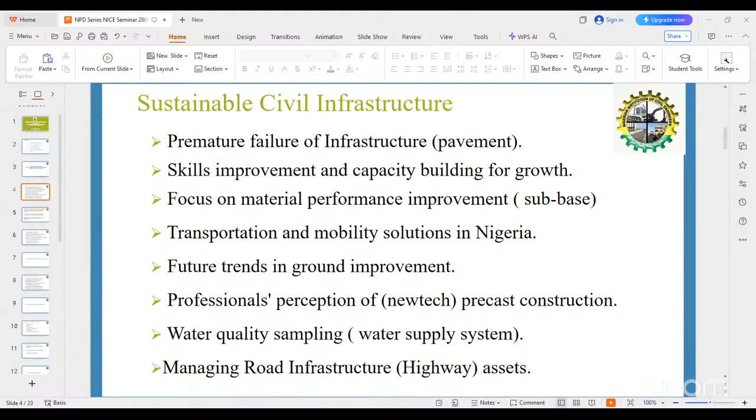Today we'll be talking about civil infrastructure. There's a big emphasis on building collapse, which is a misnomer, because we've been having building collapses for more than 10 years. But in recent years it's become almost unexplainable. I see that civil engineers have not owned it, and practicing structural engineers have not owned their turf. We must find solutions to how we practice so that we can bring sanity, so that building collapse would be eliminated and eradicated totally.

So we'll talk about buildings in urban settings. I want to focus a bit on urban cities and developed areas.

Water supply and wastewater disposal systems. Many of us are civil engineers practicing in this area, but I ask how well have we owned what has happened to the system? In the last two or three decades, anyone born in Nigeria who lives in highbrow estates, maybe in cities like Abuja, many graduates in the last 10 years probably didn't know that Nigeria had water systems that worked, where you open your tap and it would flow without needing a borehole in your backyard.

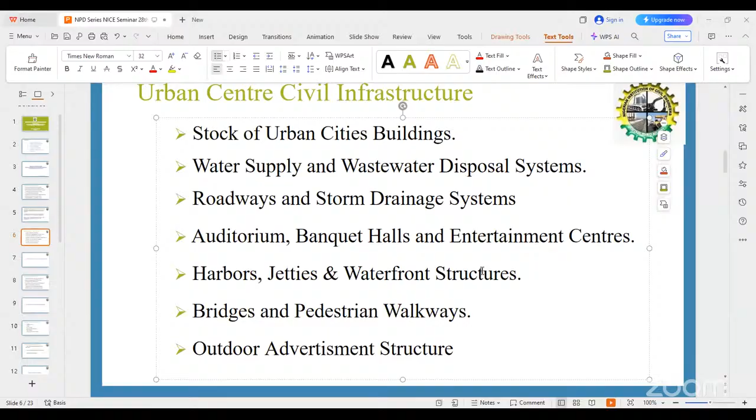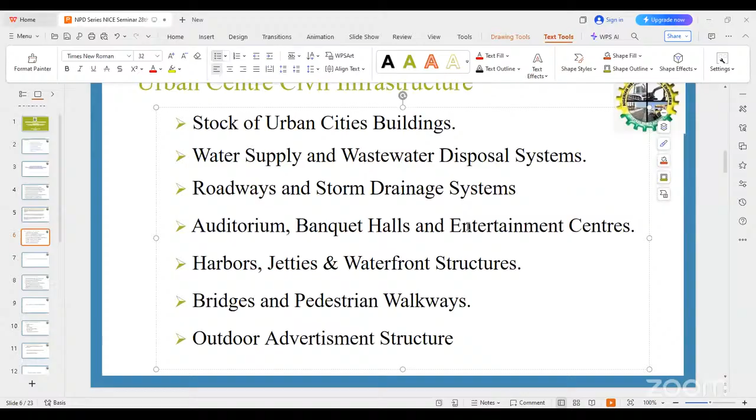So we'll look at this, and I'll speak in a very broad way, but when we have questions, I hope I'll be able to delve deeper.

Sustaining the nation's infrastructure, what do we as civil engineers perceive our work to be in sustaining the nation's infrastructure?

I put this together: we plan the required supply of civil infrastructure in a city, a nation, a region. We find that roadways need to be done to connect communities. We also find that communities need to be developed: housing, interaction, entertainment, socials, parks. So we design the civil infrastructure.

As we go with the roads, we also go over wetlands, we do bridges, and we go over land bridges with flyovers. You have quite a number of them in Abuja, one of the leading cities by population, and in Port Harcourt and the likes.

We do the development of civil infrastructure, meaning construction. Who is handling the construction? Who are the contractors, who are the designers? Are we transferring knowledge? In the last 40 years, who has been in the forefront to challenge and ensure that younger engineers are getting the required knowledge to strengthen the industry?

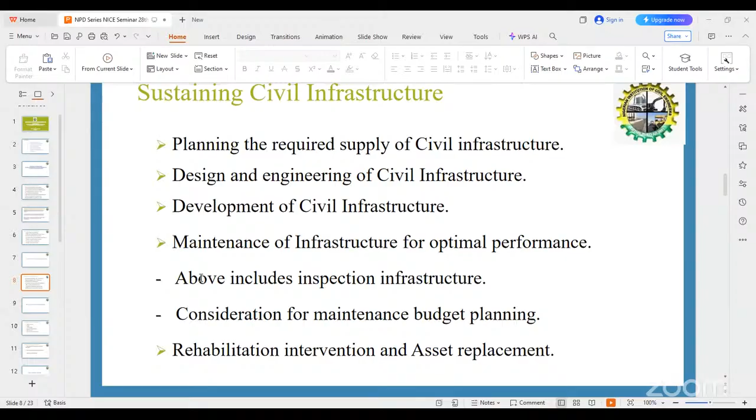Aging and failing infrastructure - let me give a few examples. Yes, Abuja was built a few decades ago, but we have infrastructure that is continuing, and we also have new infrastructure that have been planned.

But let's come back to cities that were founded many years before then, like Ibadan. We have roadways which have been the same size, and the infrastructure has been there for 60, 70, 80, even 100 years. And what has happened to it? What is the story of this infrastructure? That's what we call the aging.

Yes, every nation in the world is visiting their infrastructure for aging. They actually have what is called the scorecard in the US, championed by the American Society of Civil Engineers. I find it very interesting that we had a paper, a booklet done at a time, but I think somewhere in the line, somewhere in logistics, the infrastructure scorecard for our infrastructure in Nigeria was just missing in transit, or there was a bottleneck and it stood somewhere.

But I dare say this, that as NICE, the Nigerian Institution of Civil Engineers, we have the clout, we have the voice. We can stand to say this is what we're presenting as a white paper. We can give government the support it needs to know what and how they're performing, as these are capital projects headed by and owned by the governments in different categories, from local government to state government, who own most of the whole highway and road infrastructure.

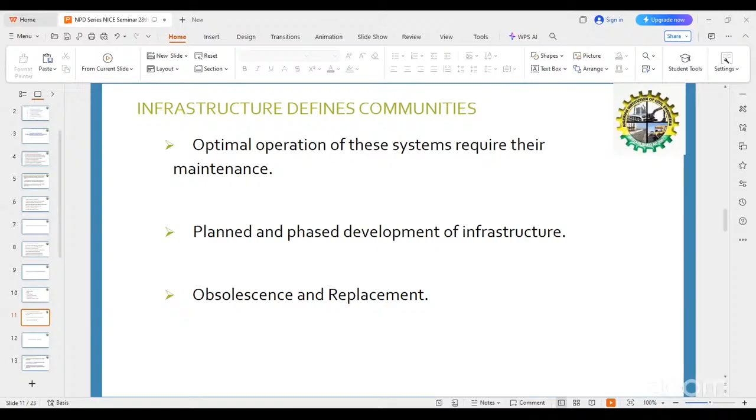Repair is always necessary. Even for a grinding machine, for pepper, you need to replace and repair. For a vehicle, you need to change brake pads. This is what we do on a regular basis because of our evaluation of a system. The same thing occurs with every civil infrastructure.

We need to check. They tell us the story and they use the word - the artisans we use say, we want to maintain it for you, we want to do maintenance for you. But the maintenance would only be possible when we have carried out an inspection. Who is most fit to carry out an inspection other than the proponents or the ones who designed it?

We restore these structures to be in a good state, a good state of performance, and also performing optimally. Sewage system - an open sewage, I mean, it just beats me.

Almost every community, everyone who has a personal building has a sewage tank underground in their compound. And when it gets full, somehow they find their way onto the common drain. Now government is making the law. I saw on social media a few days ago, it's now law under section A, B, C, D. And I said, what have we done?

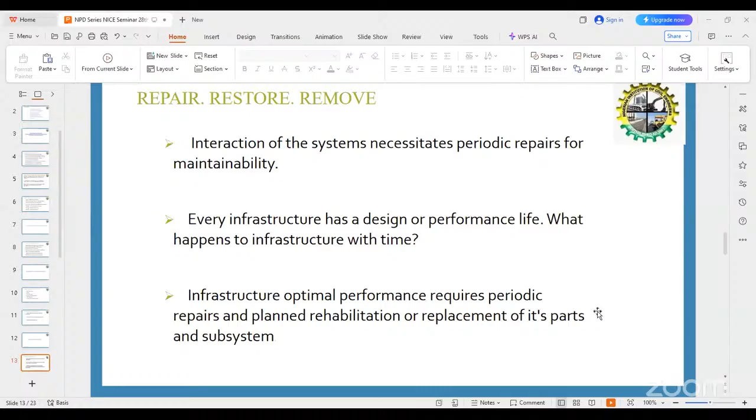Strategies for periodic infrastructure. We're looking at time, we've spent an hour since we began, but I'll rush through this and let's keep our questions. We'll take that at the end, strategies for infrastructure inspection.

So I put this together for us from the many years of experience I had in infrastructure, highway infrastructure and transportation infrastructure development, and area of practice.

Every infrastructure requires the gathering of requisite data, not just any data, the data which informs the reliability and performance state of this infrastructure. I must be able to know what is happening on every infrastructure. It must be a priority for us as practitioners and also infrastructure owners.

Like I said, most of the infrastructure is owned by government at different levels. The data gathered is required for repairs, budgeting—you budget it every 6 months, every 1 year, every biennial—and for execution of the repairs.

Recently, we also know that some things happened, and Carter Bridge was mentioned along with Third Mainland, along with, I think, Eko Bridge. They needed to do major repairs, and some of us may have seen, some of us may have read, it was very much like the Independence Bridge. It got to a point where the approach slab was already sinking.

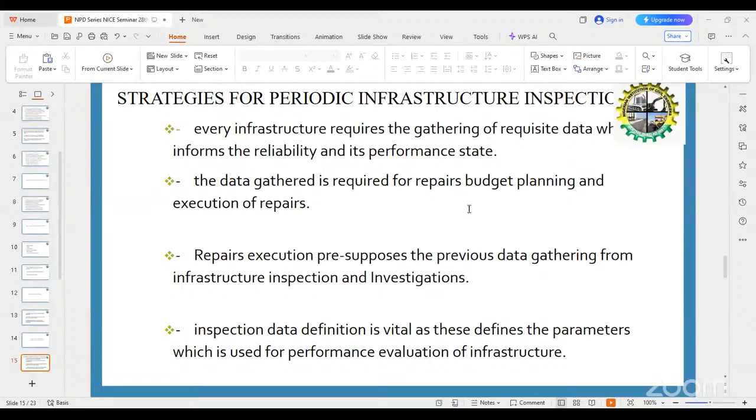So the strategies around bridge components, I'll speak about transportation infrastructure quickly. Bridge component inspection every two years - what are the things that we check? Those of us practicing in bridges, maybe in the Federal Ministry of Works and Housing now, or the State Ministry of Transport, usually have city engineers, highway engineers, or structural engineers in charge of bridges, and highway engineers in charge of the pavement.

What are you reading? What data are we gathering? I drive in Lagos, I live in Lagos, and I've just taken it as part of the norm that we drive on very poor roads. The roadway, the driving surface, is just not there. But they say, oh, we have roads, it's tarred, there's no potholes in it.

It's not just potholes. There's a number called the IRI number. Those in highway know it measures the roughness of the surface. In every one meter it shouldn't be more than maybe 2mm or so. You'll find that on our roads sometimes we have 50 millimeters variation, all sorts of irregularities. Now we have to gather best practice and begin to build right, begin to practice right.

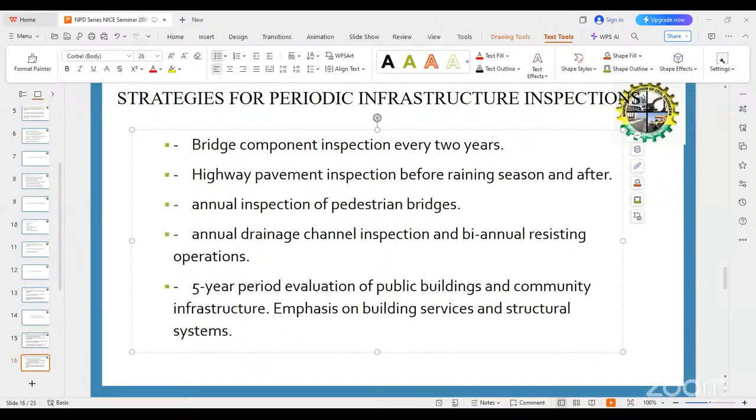There would also be, in my opinion, a way of giving credit to those who carry this out. Like, yes, you will have a discount or something on your tax charges if you do this. Lagos State, or the state, would do this and give you some incentive. We incentivize the people to do it. Not that we just... because there are many issues and many reasons why that may not just work like that.

Strategies include implementation of mandatory inspection reporting of transportation infrastructure, such as car parks. It doesn't matter if it's owned by private, as long as there's a public part of it. The state government can partner with NICE to make sure that this information is carried out. There will be a back charging of some sort, because service is given, and all of that we'll be able to track how our car parks are performing. Are the owners making good investment in the inspection and update?

The airports, the train terminals — you find that the train tracks carry the vehicle, but the train terminals become very forgotten. The waterfront structures, all our harbors, jetties, we want to make sure those who own them have mandatory reporting, maybe yearly or half yearly. We have many restaurants, clubs, or entertainment infrastructure where they are not even paying attention to the jetties, either private or public. Continuous periodic inspection reporting over time helps us in acquiring a progressive assessment of a piece of infrastructure.

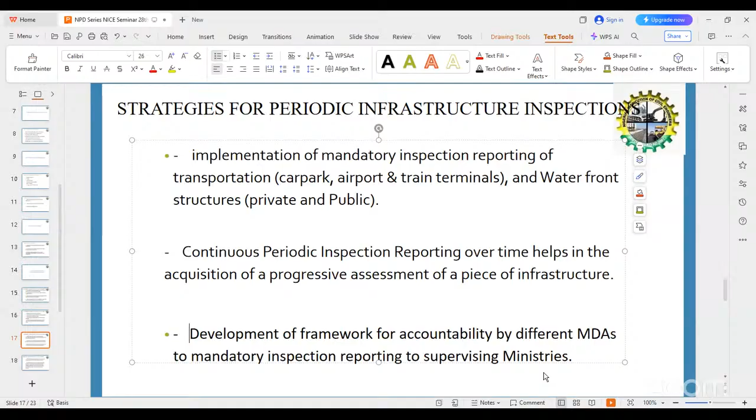The need for national infrastructure repairs and maintenance requires an annual budget per period of time, usually regional, and roads cut across many communities, many states. But we don't stop just on one end. For federal roads, we need to develop, catalog, and keep the database. Our infrastructure serves communities and is part of a network of national grid, both roadways, water, sewage. Roads link communities, and bridges link highways.

Pavement - how we must build a database of the number of bridges in a local government, and we classify all. Local governments would send these results to state government. State government will work with, maybe, the likes of NICE, and we will be able to transform this, because the state will own the majority of the roads in the state and will be able to evaluate and get the story of the data. We're living in a data age.

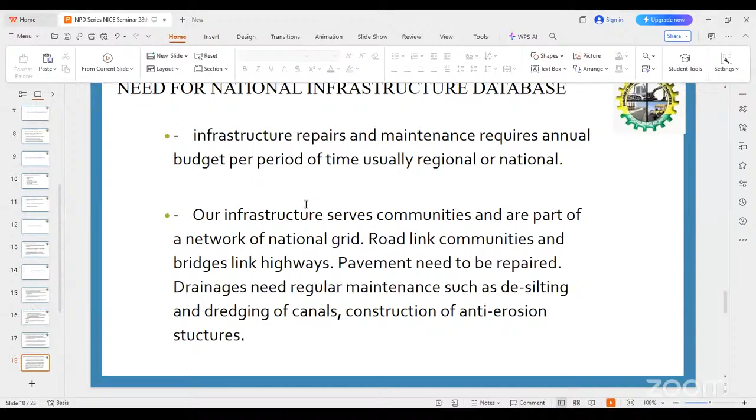The data is what gives us so much information to act upon. This is the age where wealth is built by data. And I believe NICE can spearhead and champion this - that we build a database of inventory. It cannot be overemphasized that this be developed, as it tells our infrastructure history and performance, and it also helps with projected decommissioning dates.

We have to pull this down. We have to do something bigger. The road is obsolete - a one-lane bridge is not needed now, we need four lanes, it's now obsolete. Can we attach to it? Or what will be the economic impact to pull this down? And all such development it provides - we have to reference the body of knowledge.

The coming engineers who are just leaving school, the intermediate, the junior engineers - we have the much older engineers who have been in this practice in different areas, those that we have not been very active in. We have to resuscitate and begin to build up and transfer this knowledge, seek ways and methodology to transfer it. This will go beyond just a one-hour seminar. We will employ staff, we will put younger engineers in a way that we consciously plan to pass the knowledge to the next generation.

There we also save foreign exchange from employing foreigners and foreign practitioners, engineers, to come and do this. The body of knowledge needs all the information. How do we do budgeting? What do we do as costs?

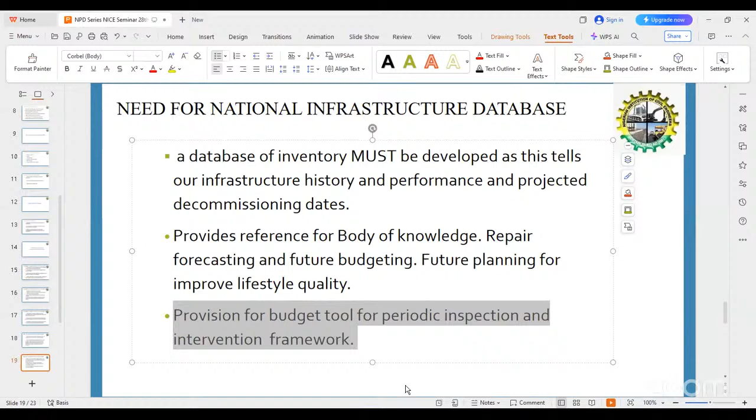There's enough work to do rather than we fold our arms - provision for a budget tool. When we carry out inspection, we'll be able to advise what should be done and the cost to do it. And these are numbers which are supposed to go to the House of Reps, the Senate, and they pass the budget. Let's leave the issue of malpractices aside - at least let's see that we're doing the right thing, we're seeking to do the right thing and getting the budget right. Then we'll be able to carry out more of the other things which are required.

And these are the strategies, some of the ones that I've put up, and these have been from experience and what we see. What are the next steps? Quickly, I want to just look at four, five, six.

A database of inventory must be developed for every piece of infrastructure. Take, for instance, Lagos - we must know all the bridges, location, every bridge must have an identification number. Every bridge must have components, ratings. What is the reliability? What's the load rating? What is the load that it can carry? And then the state of that infrastructure, or the barriers - are the guardrails taken away?

So we know that in the next year or so we have - how important is this? The gap between the joints is increasing. It has become 25 mm, now another year it's become 40 mm. We can project that in the next year it's going to be this much. So there is need for us to fix it.

Repair plans and procedures to support infrastructure owners - so we go as NICE, develop from our retinue and our broad body of knowledge and experience across our practices. And we will develop white papers on how and what we're looking for - the checklist, the inspection manuals - and we also have a plan for repairs.

Upskilling and capacity building of our professionals. Many young people find that they only find jobs in building practitioners, structural and construction. But I want to challenge us that there is also stormwater.